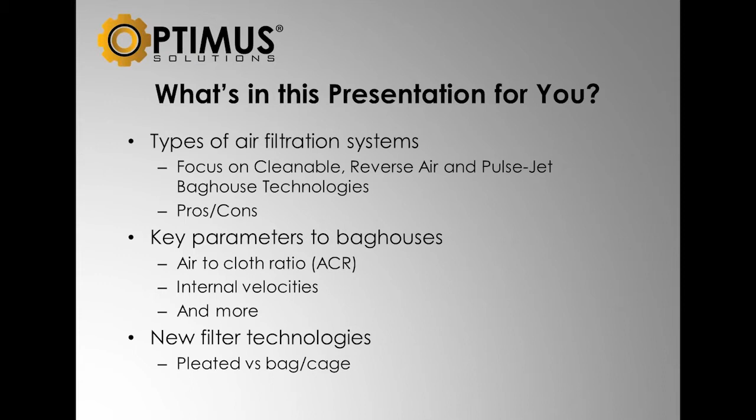My background is, as Tom said, I've been in the industry a long time, in various positions as chief engineer, technical director, that type of thing, mainly in hot gas filtration. But also in pneumatic conveying, process-type filtration, smaller collectors, and even larger gas turbine inlet filters. So I've got fairly wide experience in cleanable dust collection. This whole presentation is basically focused on cleanable gas, where you're using some method to intermittently clean, or have a continuously operating collector, rather than a static furnace-type filter.

One of the natural questions is why do you have particulate control, dust control, fabric filtration, however you want to term it. Mainly there are three areas: collect product, which is more of a process-related application where you're generating a usable, sellable, valuable product. Second, probably most common for larger utility-type baghouses, is nuisance collection, where you're complying with government regulations - that could be OSHA, could be MSHA - basically where you're required to control emissions to a certain level. And third, to protect resources, which is somewhat related to regulations, but it's to protect personnel, prevent toxic materials from being released, that type of thing.

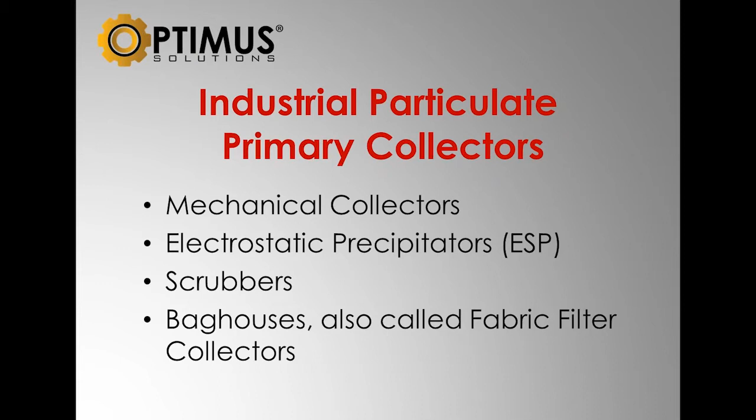Typical industries where these types of devices are applied - some of them pretty obvious - food and pharmaceutical processing. In food, you have both nuisance dust to prevent dust from getting from the atmosphere, but also your grinding, crushing, pulverizing, conveying material that you need to separate the dust or particulate from the airstream.

In chemical plants, you're doing the same thing: grinding, crushing, mass transfer, that type of thing. In consumer products, there's a lot of cosmetics, detergents, soaps, that type of thing involving some milling or some kind of size reduction of products. Mining, obviously, is the same thing, where you're taking rock or whatever, grinding it, and extracting it later chemically or whatever.

One of the big uses for a lot of the fabric filters is in rock dust - cement production, lime, asphalt, hot mix asphalt, coal, that type of thing. Agricultural products, that could be at the farm level where you're bringing produce into a grain elevator, and then it's taken on to food processing. Primary metal processing could be alumina, where you're grinding and processing or removing fluorides from the alumina, and batteries.

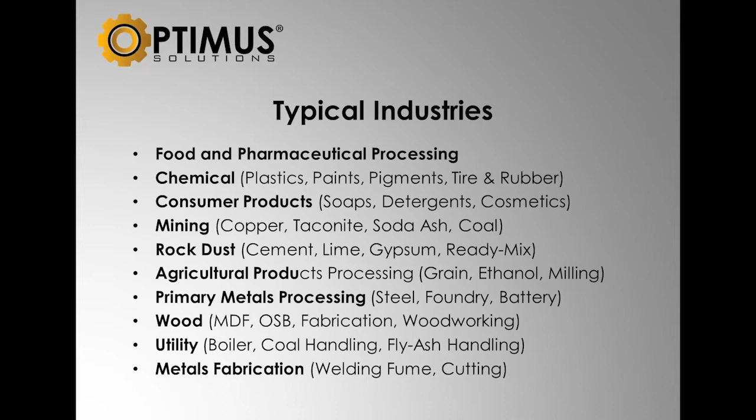So it's very much custom equipment. If we talk about pre-collectors, all of these except the last one are basically utilized mainly as pre-collectors. The main purpose we're trying to serve with a pre-collector is to relieve the dust load, or to filter out, or to classify some of the usable products.

In other words, you might have a process where you have a usable product that is a maximum size or a minimum size, let's say 100 mesh, so you may want to use a settling chamber or a baffle plate type collector that's integral to your equipment to remove that product and not convey it to the baghouse, where you then have to separate it from the finer product that might not be usable.

So in a lot of industries, probably the knockout box and cyclone are probably the two most common collectors used as primary or secondary collectors, or as pre-collectors. The cyclone, especially in the 50s and 60s, was used a lot as a final filter.

And you have the problem there that on smaller particle sizes, you might only be 80, 90, 95% efficient, which after all the legislation is not going to meet current requirements, but it's still very useful in separating larger products or classifying it. So would this be normally a requirement, or is it a little less expensive just to have this kind of coarse filtration first?

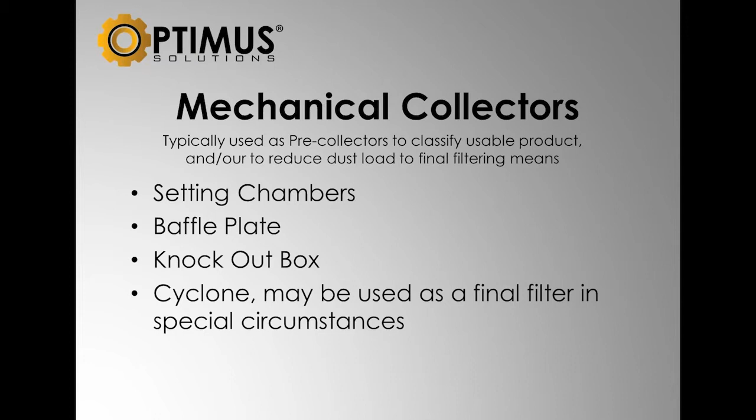Cyclone -- to talk about some of the advantages and disadvantages of cyclone collectors: there's no moving parts, it's simple, it can be fabricated by almost anybody that has simple fabrication methods. It's able to handle very high temperatures, only limited by whatever metal is used in the construction, and you can combine a large number of smaller cyclones to really increase the overall efficiency of the collector.

One big disadvantage is the airflow through the collector varies, and it drastically affects efficiency. If you have a process like combustion where you're constantly varying the airflow to meet your combustion demands or cycle demands, your product is going to go all over the place in terms of amount and size. It's not suitable for sticky materials, and if you're dealing with a very abrasive product, you can have a lot of wear issues.

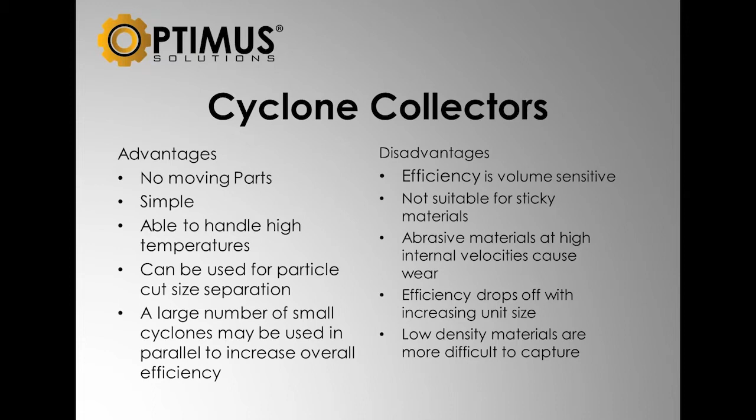Your efficiency drops off very dramatically with smaller particle sizes, so if you have a lot of small particles you're trying to collect, it may not be the best choice. Low density products like wood shavings are difficult to capture and recirculate back through the system. And if you look at typical cyclones, a standalone or large diameter cyclone is probably limited to about 10 or 15 feet in diameter, or then you start having a lot of bypass.

To make them more efficient, you can combine them into a multi-tube cyclone where you have many smaller cyclones stacked together, and you can achieve efficiencies of 95% or more below, let's say, 1 micron or below 5 micron. So it's still a workhorse of industry, but still not usually considered a primary or final collector.

Yeah, you can get most of it. It's more of a polishing situation.

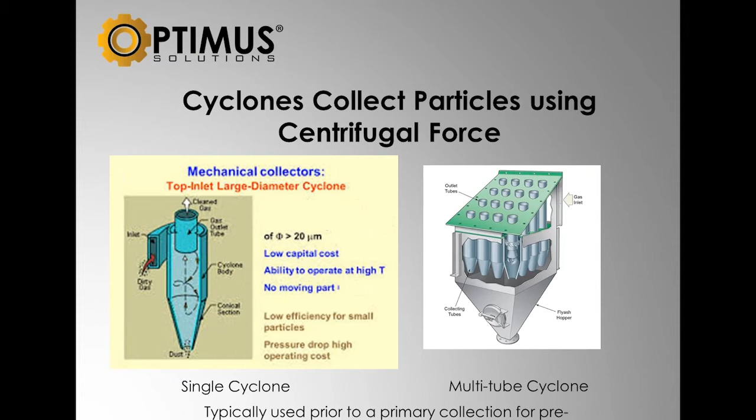The other technology that was used particularly in the mid last century were wet scrubbers. When I'm talking about collecting product, I'm talking about particulate, not necessarily mass transfer, adsorption, or absorption, where you're trying to do more than just collect a solid particulate. So I'm limiting the discussion today to that type of application.

Wet scrubbers have a lot going for them. You're able to handle sticky, hygroscopic materials, and combustible, corrosive, explosive materials. These are particularly valuable as a type of collector to use for coal or where you're handling metal dust or something that is extremely explosive. They're very good, and they're used a lot for that.

They're also good for collecting particles that are difficult to remove when they're dry. And you can have soluble gases and things like that you can collect. They'll be collected in these filters that wouldn't be collected in a dry filter like a baghouse.

With these liquids in the scrubber, is that normally water, or can it be a solvent in the case where you're trying to remove some kind of soluble product that you're trying to recover or prevent from getting to the outside? You can also add reagents to absorb sulfur oxides, or there's things like that can be done with a scrubber that make it a very versatile tool.

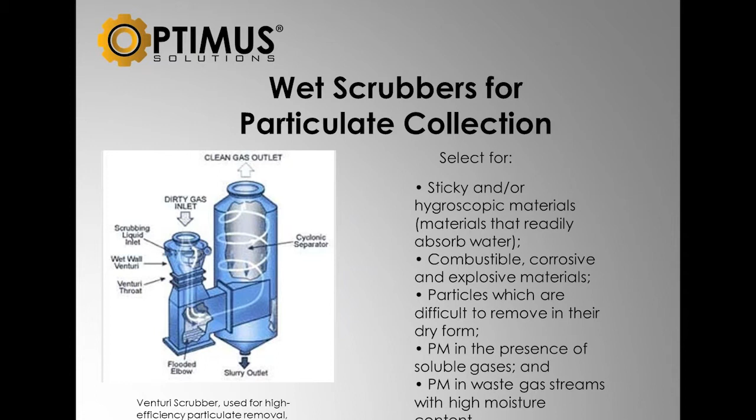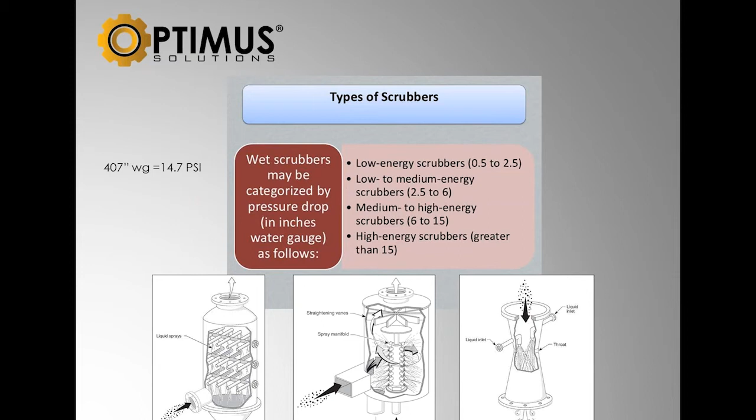Advantages: low capital cost. They can treat high temperature gas streams, and they can collect really sticky products, and there's no secondary dust sources. Disadvantages: you might have to have a pond or a tank or recirculate.

You're using a lot of water that may be hard to get rid of once you've got the pollutant involved with it. And you're wetting all the surfaces inside.

So if you have acidic gases, you can have a lot of corrosion and issues with that. And then usually you have to have a cyclone or something to take out the heavy material, to reduce the dust load on the collector. Water pollution is an issue, and it requires freeze protection. Obviously, you can't operate them at low temperatures without having freezing issues.

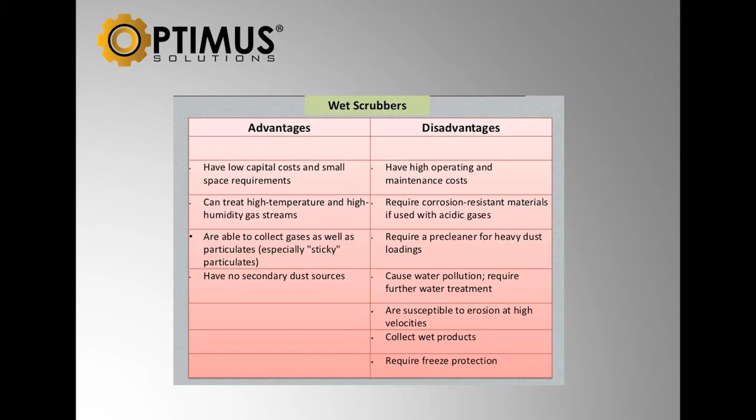So it almost sounds like you want to use wet scrubbers if you need to, not because you want to. Right. A typical use, a lot of them are used for really sticky dust streams, like if you're producing cereal where you're using sugar as your coating materials. Obviously, they're very good for controlling that. You couldn't put that in a dry collector. But again, they're limited, especially the lower pressure drop collectors are not very efficient. But they have their place, and they're still used worldwide for particulate control. One of the probably most common types of collectors, especially used in utilities, or

probably in the 1960s through 1990s, were ESPs, electrostatic precipitators. Basically you're putting a charge on a particle of one polarity, and then you have collection plates of the opposite polarity, and you're collecting the products on either plates or wires, and then periodically you're rapping them or doing some mechanical action to dislodge the particles.

The real advantage on these things, and the reason why they were used a lot at cement plants and large volume applications like utilities, is they're very low pressure drop. Because the velocities through the collector have to be so low for the particles to be collected by electrostatic forces, you're at laminar flow, maybe 200 or 300 feet a minute through the whole collector, so you can handle large volumes of air at very low pressure drops across the collector.

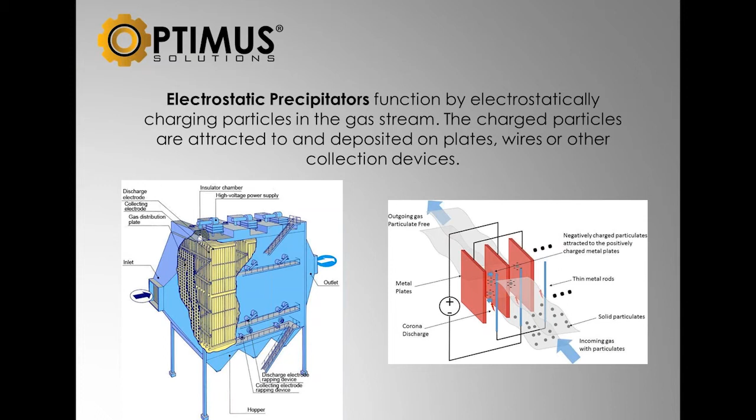So they're very economical. The problem comes if the resistivity of the ash that you're collecting changes. In other words, one of the problems with power plants when they switched over to some of the lower sulfur coals, the resistivity of the fly ash changed, so the efficiencies dropped dramatically.

And also, once they're installed, it's very hard to make them increase the flow, the capacity, or make changes to them. They can't control gaseous emissions. They're simply for particulate, and the initial capital costs are very high.

And these things are huge. If you look at a typical utility boiler application, these are football field size collectors. One nice thing about them, since there's no pressure drop to speak of, they don't have to be structurally really robust, almost like a building is basically what you have, but that prevents them from being, in some cases, converted over to other higher efficiency type collection equipment.

They're really low operating cost, they're durable, they last for years, and they can have very high collection efficiencies even for small particles. But for the most part, the newer legislation that has dictated lower emission levels, they can't meet those levels of efficiency.

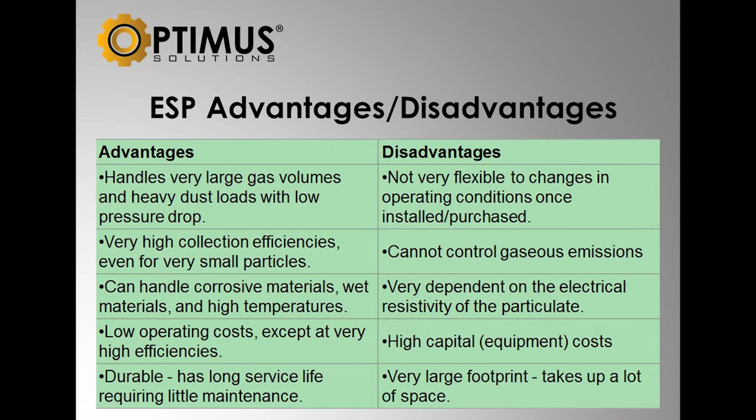So the next technology, probably one of the oldest technologies for fabric filtration, is the shaker baghouse. And I think there were some of these around even in the early 1900s, probably on metal collection and fume collection.

Up until the 1960s, it was probably the most common type of collector that you might encounter in the industry. And typically, the big difference on this type of collector is that the gas comes in through the interior of the filter, not on the outside, as we'll talk about later on some of the other filters. So all the incoming dust and airflow go up through the internal tubes. And these are intermittent type collectors because you can't have filtration taking place during the cleaning cycle.

Typically these would be in compartments. There might be a baghouse divided into several compartments or separate modules, and that module would have to be isolated and taken offline. Then a mechanical shaking mechanism would cause the dust to dislodge and fall into the hopper.

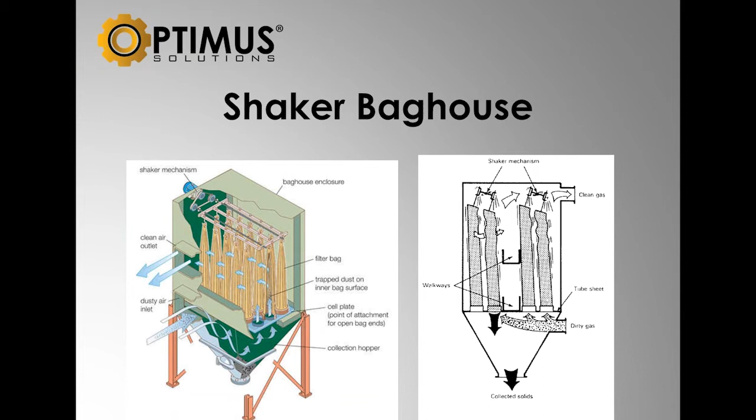These were very effective, simple, and the collection efficiencies could be very high. They did operate at very low velocities - we'll talk about this air-to-cloth ratio factor, but it basically means the dust through the fabric has to be in a neighborhood of less than 2 to 1. You can have low DPs and collect fine product, but they are limited. They are big because it takes a lot of filter area.

The maintenance can be very expensive because you're shaking, you have mechanical parts. It requires people to enter the compartment to do maintenance work, and they're not really good for heavy dust loads, because abrasive dust everything has to come through the bottom of the filter, so you can have wear issues if velocities get too high. There's still a lot of these around, but they're probably not the first choice for a high volume, varying flow type system.

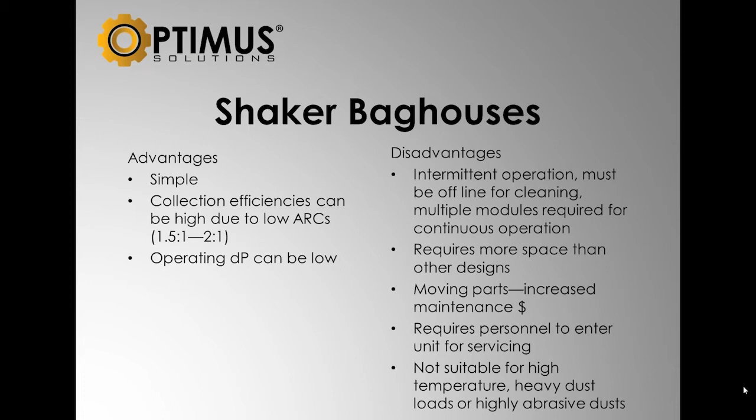The next step up in technology from shakers, chronologically, were the reverse air low ratio baghouses. The same way as a shaker, dust collection takes place inside the tube or filter. Instead of shaking, typically a module is isolated, and then either a pressure fan blows air in the opposite direction of filtration, or in some cases negative pressure in the system draws air in, and they might even be combined with shaking.

There are some units that have both shaking and reverse air. The big problem here is that they're usually talking about fairly long tubes, maybe even 30, 40 foot long. So you have to have metal rings sewn in at various intervals, which keeps the filters from collapsing and trapping dust during the cleaning cycles.

These were used a lot in power plants as an alternate to the ESPs up until the last few years. Now, typically, most of these have been replaced by pulse jet type collectors.

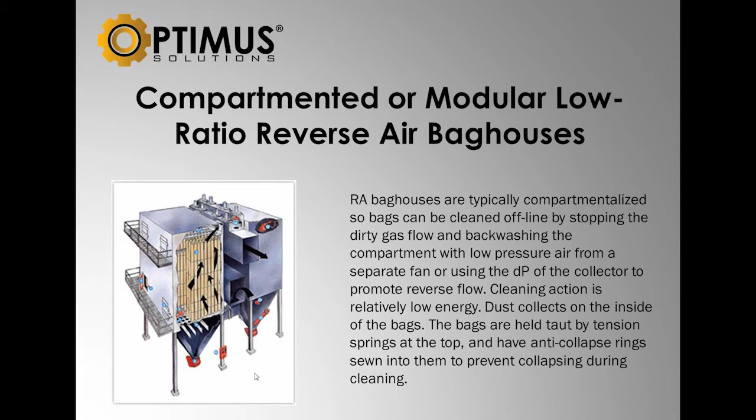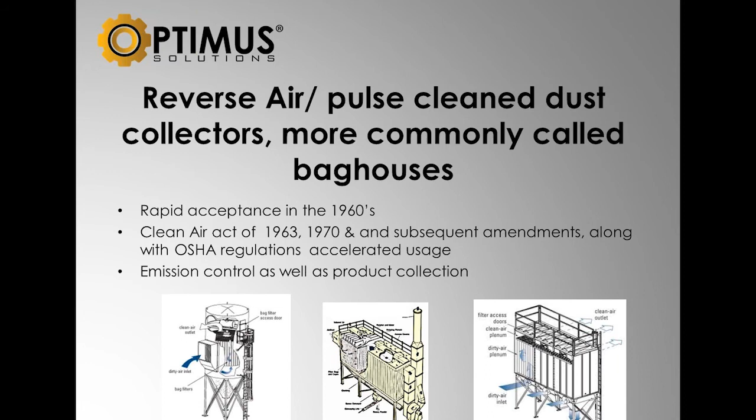The equipment I want to talk about mainly, on the right here, is a pulse jet collector. Here we're using compressed air to backflush and clean. This type of filter is really probably the most commonly encountered piece of control equipment in the world now. It has a lot of advantages.

It can arbitrarily be classified in 3 ways. Our equipment is configured and sold in 3 different categories, and it all has to do with the pressure of the air used for backflushing. These are kind of arbitrary because they change a little bit, but the low pressure, high volume are typically cleaned using a PD pump or a Roots type blower, whereas the medium pressure and high pressure, low volume are typically using compressed air. In some cases it can be a gas, could be CO2 or nitrogen, if you're dealing with a combustible atmosphere.

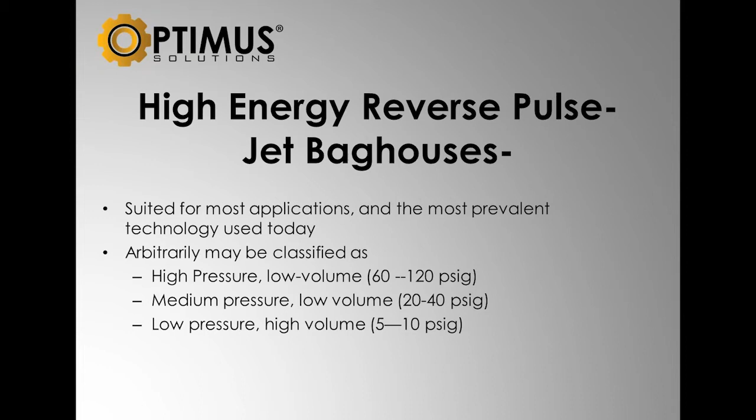So if I had to break it into 3 chronological progressions - would it be we start with shaker, then reverse air, and now pulse jet? That's kind of the progression. I mean, there's obviously overlap in the use. Right, that's true.

And the pulse jet now is the main one. I mean, there may be instances where some of the other technologies, because of very specific system requirements, may still be the preferred method, but this is the most commonly encountered method these days.

Those things require modules, mainly because a utility typically has to operate year-round, 24/7. So in order to do maintenance or take something offline, they need to be compartmented. Plus the cleaning is sometimes done offline. You take a few modules offline and reverse clean to assist in dust removal. So they're typically modular or compartmented style collectors.

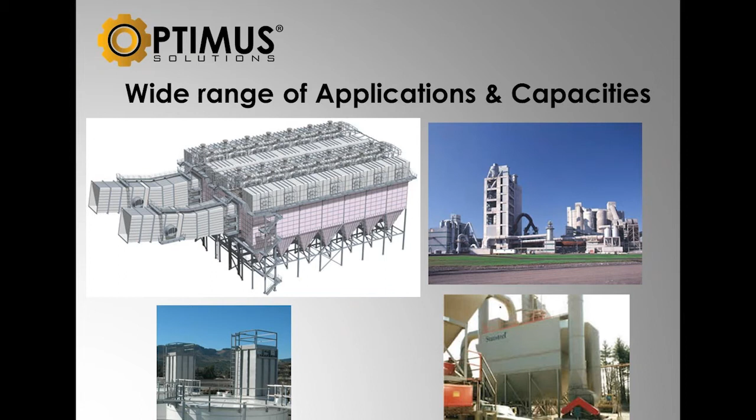The pulse jet, the different... when we're talking about a reverse air unit, excuse me, the reverse air unit with the fans or other methods of cleaning may have a few seconds, several seconds, or maybe minutes where the backflushing takes place, and this decreases the effective filter area that's online.

The pulse jet cleaning takes place with a short burst of compressed air. Now, the electrical on-time or signal is usually 1/10 of a second, but the effective cleaning valve opening and closing is probably 1/4 of a second. So you can have filtering taking place online without effectively affecting the flow.

The cleaning is actually done while the unit is online, the reverse pulse overcomes the flow through the filter bag and has enough energy to actually create a shock wave that removes the dust. Very effective, very cost-effective cleaning mechanism.

The cleaning cycle is regulated by a remote timer connected to a solenoid valve. This can be done from very simple control systems all the way to PLC and computer control systems.

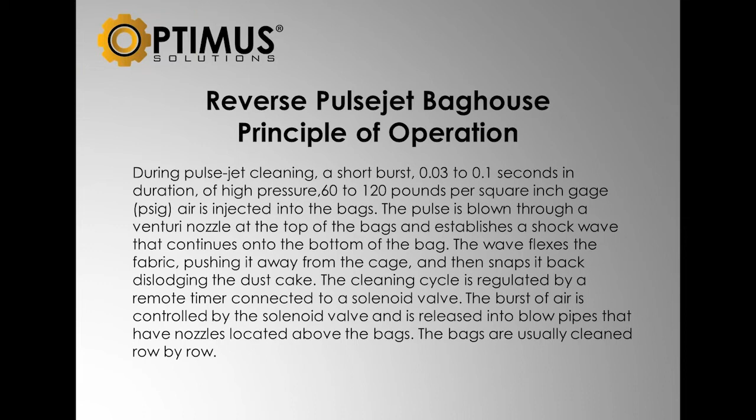You don't want rows next to each other cleaned together. You don't want the dust just jumping from a clean bag over to a dirty bag, or a dirty bag over to a clean one. So you want to stagger it. A lot of collectors are set up to clean sequentially, but I always like to have some separation during the cleaning.

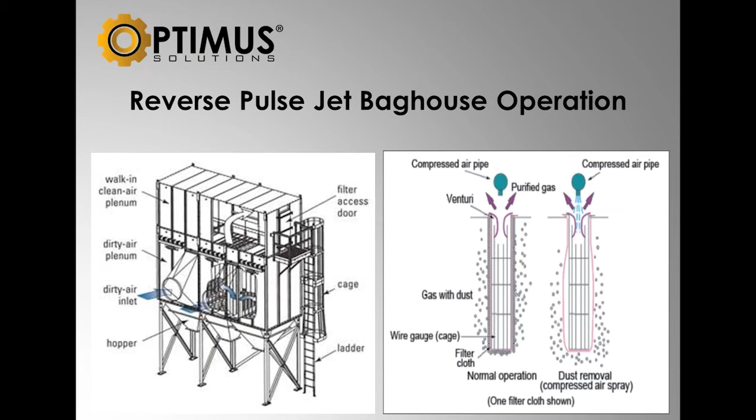We're going to talk about some of the things that are important to the design of a baghouse. It's important for the end user to convey what they're really trying to do with a piece of equipment and what's critical to them, to the designer of the baghouse. The designer is going to use that information, and we're going to show some typical data sheets for accumulating that data.

They're going to use that information to select the material, the air-to-cloth ratio or how much material is going to be used for the gas flow involved, the upward velocities between the filters and in the housing, the inlet where the dust is going to come in, what kind of cleaning mechanism is going to be used, and ultimately how you're going to remove the dust, whether it's a screw conveyor, simple hopper, that type of thing.

To quickly summarize, what we just did was chat about the different types of air filtration systems. You can have a pre-collector related to cyclones, et cetera. You can have scrubber systems, ESPs, baghouses, and we'll chat a little bit about the progression on baghouses from shaker to now the pulse jet.

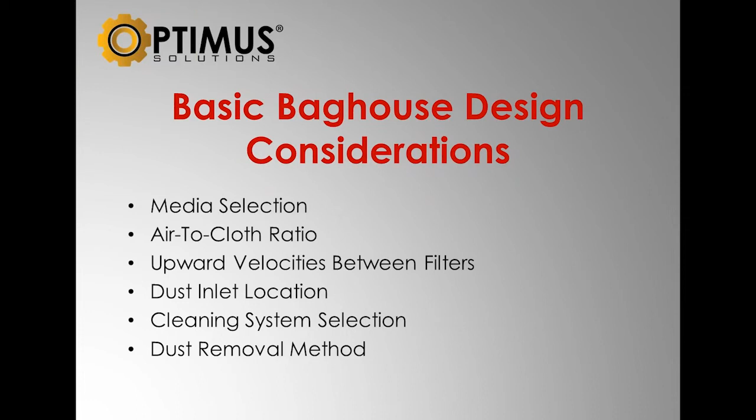One thing that really affects the efficiency and ultimate pressure drop of a collector is the size of the particles you're going to collect, and it's not only the range, but also where the distribution of particle sizes is concentrated. If you have a very coarse product combined with a very fine product and nothing in the middle, that requires some different considerations. So if I were the plant, or someone designing, these would be the things you'd start going through on your checklist.

If I want to go from scrubber to baghouse, or from baghouse to a bigger baghouse, here's the data I'll probably start needing. It's important to know the distribution, how and where it's concentrated, particularly on the small fraction - just how fine is it, and what percentage of the total dust load is that fine submicron, below micron size, or even maybe 5 micron.

The air - when I say air or gas, air is a mixture, a mechanical mixture of gases. In a lot of cases we're collecting combustion products, which aren't really technically air because of the constituents. So anyway, when I'm using that, I mean gas or air interchangeably.

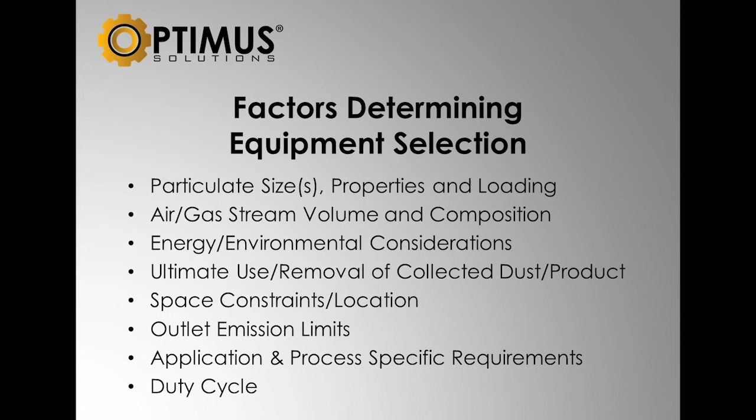Once you know some of this material, this information, then you can pick a fabric, filter media. Probably the workhorse of industrial filtration is polyester, which has a limit of 275 with the fabric and 250 with some of the other more rigid products. It's good for most things.

Acrylic is not used a whole lot, except for some problems where you are in the higher limits of moisture. Fiberglass is used a lot for boilers and for hot gas applications. Nomex or aramid fiber is used primarily in the rock industry, where you're talking about below 400-degree temperatures.

Ryton is used in power plants, usually on a reverse air baghouse, typically PPS or Ryton. P84 is kind of a specialty product that not a lot of people are going to be using, but it's used where some of these other products aren't useful. Ryton is not very good at high oxygen levels, so you might have to use a P84. It's not a very common fabric.

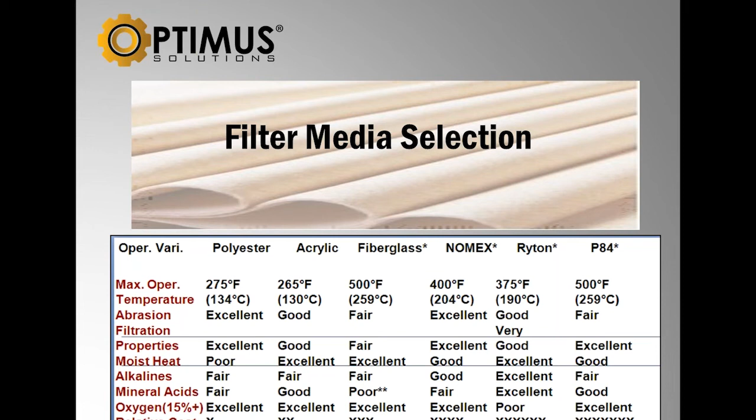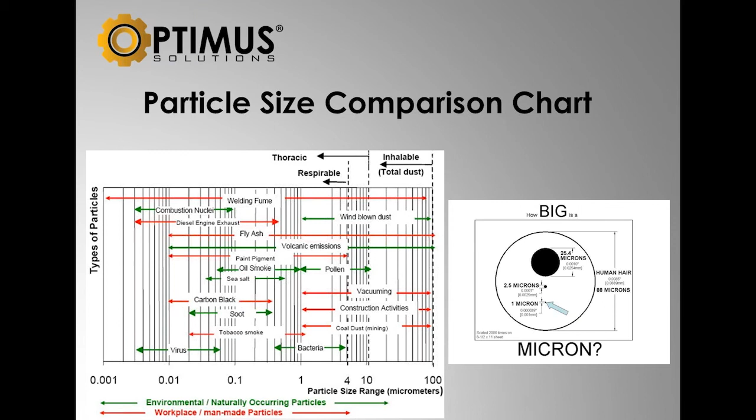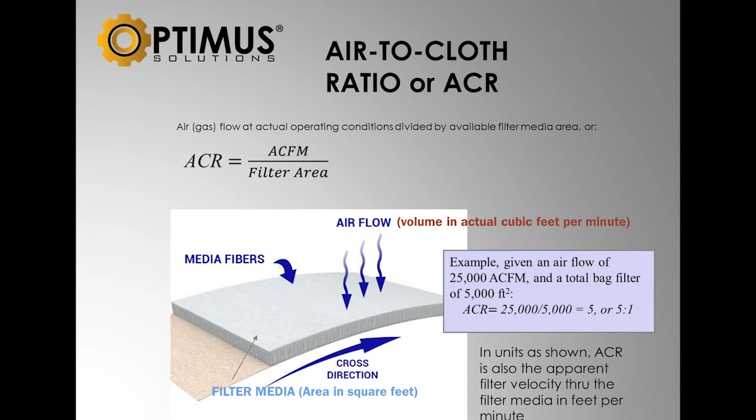If you look at typical air-to-cloth ratios for nuisance type collectors handling fairly light loads, 5 to 7 to 1 are pretty common. Boilers and high temperature applications are usually in the 4 to 5 to 1 ratio. Agricultural dust can be as high as 10 to 1, easy to collect type products. Fume generated by thermal processes is 1 to 3 to 1, even with pulse jets, they're very low.

So what does it mean if it's high versus if it's low? Well, the higher air-to-cloth ratio you can go, the smaller the unit can be, cost-wise, the footprint. But on the same token, if you start pushing the air-to-cloth ratio, then your operating pressure drop typically increases.

These typical baghouses work in a range of about 2 to 8 inches of water column. And if you've got a large amount of gas you're collecting, your compressed air costs can go very high. So in some cases, you're better off, even with a higher capital cost, selecting a collector that operates at a lower air-to-cloth ratio, from the energy conservation standpoint, compressed air usage standpoint.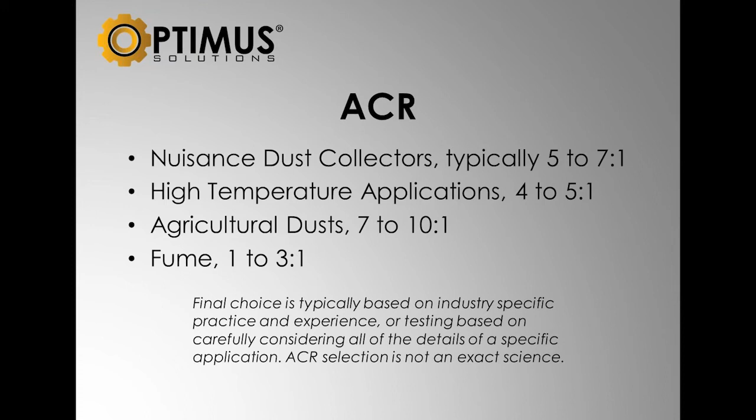Another factor that's important, especially on these larger collectors, is your bag lengths start getting over 10, 12 foot long. Some utility baghouses can have 30-foot filter bags in them. When you start getting larger, probably over 10 foot in particular in length, you have to be sure that the upward velocity between the filters isn't such that the dust being pulsed off never falls down. If your upward velocity is higher than the terminal velocity of the particles, you're going to have an issue.

When you calculate this, some people interchangeably call this can velocity, but I think that's confusing, because some people use that word to describe the velocity below the filter bags, where you don't have bags. But I think the important factor here is what is that velocity between the filter bags.

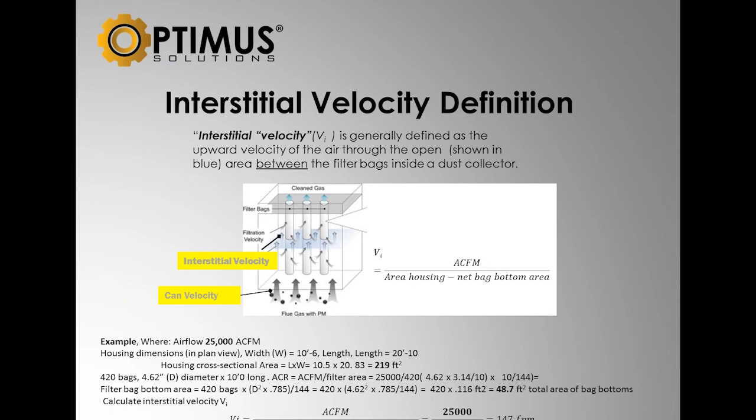Basically, you take the cross-sectional area of the filter housing and subtract the area that the bag bottoms take up, then divide that into the air volume, and that gives you your apparent velocity between the filter bags. Typically 300 to 350 feet per minute is probably safe for most products. But if you get into a low density, high filter area particle, it can be as low as 50 or 100 sometimes. So that's another reason why knowing all the properties of the dust and the application are important.

This is just a typical system. I just showed this to show the principal components in a pulse jet or baghouse, compressed air tank. I think it's important you have a reservoir for a couple reasons: to allow some condensation to take place and keep that away from the baghouse, and it's very important that you have clean, dry air being used to pulse filter with. It's important you have a filter trap or moisture trap and also an oil separator prior to going into the dust collector.

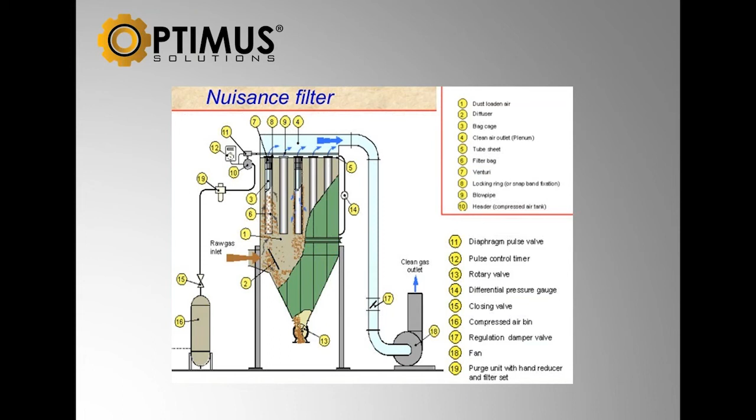Item 10 here just shows a typical reservoir, the header where the pulse valves are mounted. There's your controller means of some way, showing a sequence of valves, and then the clean air plenum and the dirty air plenum. Most of these filters are set up as a negative pressure arrangement so that any leakage you have is into the filter and not dust out into the atmosphere - puffing on the outside. So you want leakage to be clean air in, not dirty air out.

Advantages of pulse jet, reverse air pulse jet collectors: very compact. You can operate at usually much higher air-to-cloth ratios than you can with the other technologies we talked about. One good thing is they're stable, because you're pulsing online and pulsing only a small part of the collector, and by using a small volume of air to pulse with, they're good for combustion processes or air applications that require constant flow and not much variation in pressure drop. Very high collection efficiencies are possible. They can operate up to 500 degrees, and even higher with specialized medias. The dust inlet location can be varied depending on the type of particulate you're collecting.

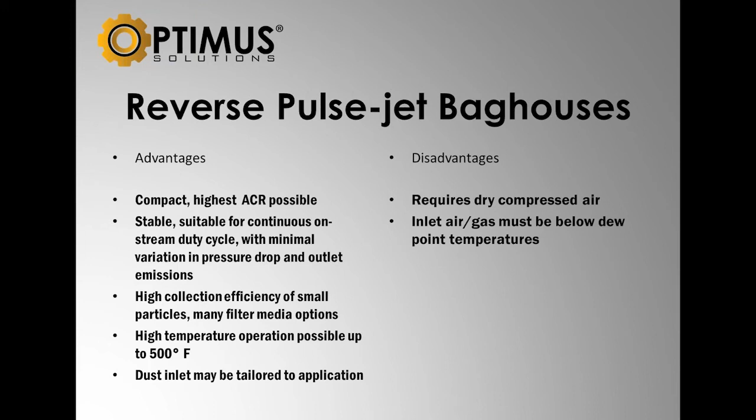Disadvantages: they need dry compressed air. If you're operating a baghouse in Michigan in the wintertime, you really have to worry about moisture content in your compressed air. Obviously your inlet air or gas has got to be below dew point, or you're going to have mudding or other operational problems.

It's very important that each one of these valves, when you operate - the typical sizes for a dust collector are anywhere from 3/4 inch to 1.5 inches, maybe as much as a 2.5 inch valve. A 1.5 inch valve will consume about 4 CFM in a pulse.

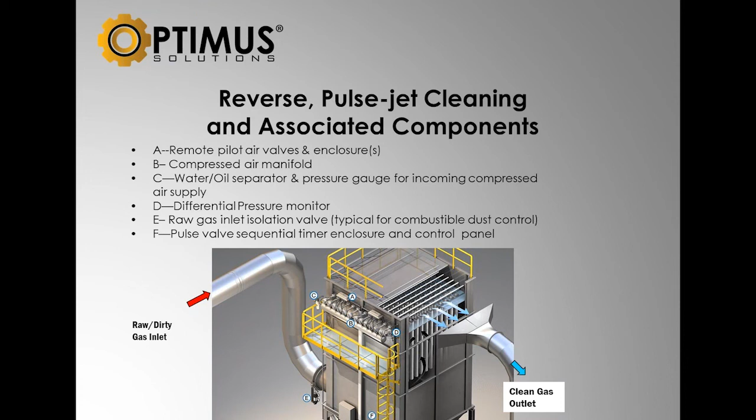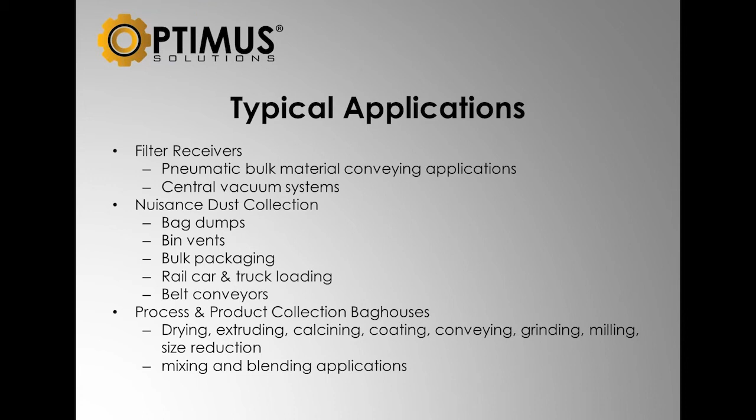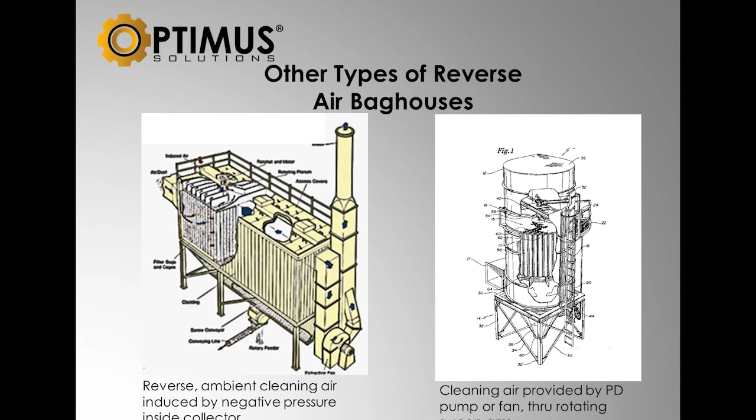Explosive - if it's explosive, then that causes issues, and most organic products are. People don't think about sugar and coal and corn, and get to plastics - all those things are explosive. If you can burn it, it's explosive for the most part. And even metals - you can have fine aluminum or magnesium or something, it's very much the same. So it's important to know if you have any of those products you're handling.

And there's very specific National Fire Protection Association and factory mutual requirements if you have any of those products, depending on where they're being used, what has to be done, and whether it's an inside or outside location.

And then the particle size distribution - a lot of people aren't going to know this, but today with some of the requirements that OSHA has, although some of those requirements are suspended right now or not being enforced, it's very important to know the particle size distribution. And if you've got an explosive product, as a user, you're responsible for telling whoever's designing the equipment what the particle size distribution is, because that affects how explosive the product is.

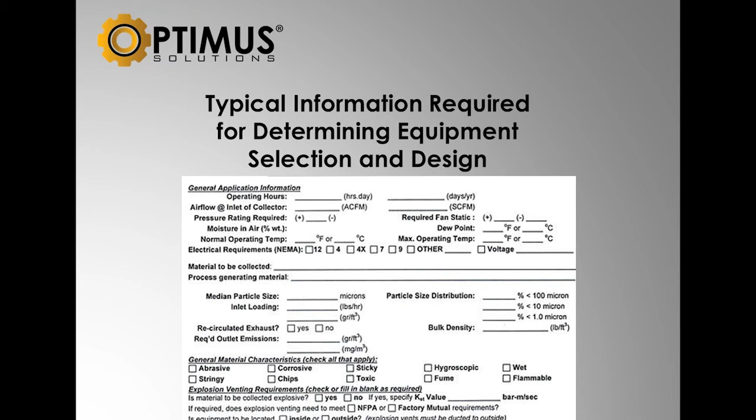Okay, so overall on the design side, the particle size is incredibly important - I know that you mentioned that multiple times. Right, and ultimately that determines what media you pick, depending on the sizes. And it sounds like also you've got your air to cloth ratio, right - you can have it high, you can have it low.

The two competing parameters: you can put more air in or less air in, but that will affect your pressure drop. It's that two competing pieces that ultimately you pick depending on the application. If you can handle more, great. If you can't, that's fine too. It's more of here's 10 different factors we need to consider, and here's kind of that sweet spot you need to be for that application.

That's true. Even if you can tolerate a higher pressure drop by pushing the unit, you also have to worry about a tipping point. There's a point where the cleaning system is not going to work, not going to effectively keep the pressure drop constant, and you're going to lose control. Typically if that happens, the unit has to be shut down, and hopefully you can recover by cleaning offline or reducing airflow. That's why some people think, well, if I have 1-inch valves, I can put 1.5 or 2-inch and get more air through it. But for a given product, process, and concentration, there's a tipping point where all the pressure in the world isn't going to help.

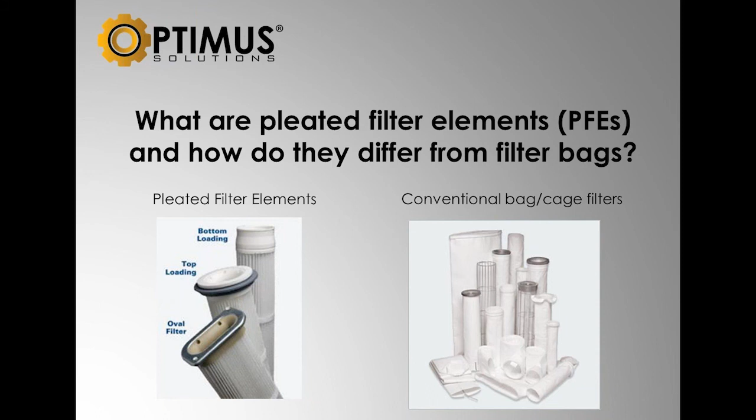If you look at a typical bag, the one on the right, for some reason the size is missing, but I recall this is 16 feet long. At a 6-to-1 air to cloth ratio, this bag would have a capability of about 200 CFM. The same filter, a 6 foot 8 inch pleated filter, operating at a lower air to cloth ratio, would have the same capacity. So you're replacing, in this case, a 16-foot bag with a 6'8" pleated filter for equal capacity.

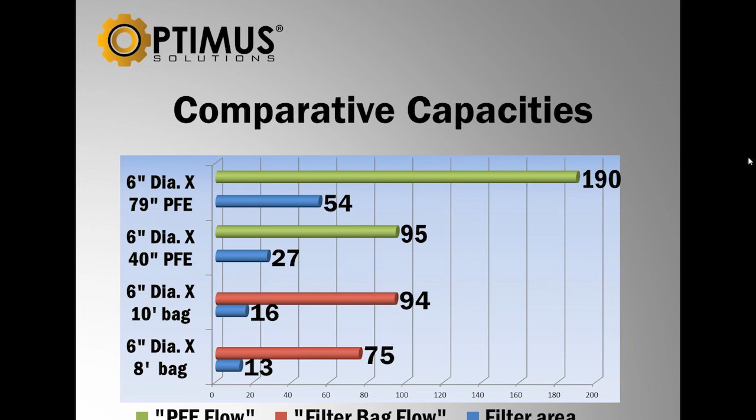Now there's some caveats on that. There's always a caveat—for some reason that's not changing. There we go.

There's some, obviously with the pleats, they're going to be a little more susceptible to clogging or filling up with a really wet product, and that type of thing. So there's some products that they don't work well with, but actually it's a very limited number of products that they don't work with.

Because we're talking about pleats now that are a half-inch wide at the top. They're not like a paper cartridge where they're wedged in 12 pleats to the inch. There's maybe 2 pleats to the inch. So we're talking about a wide open structure, and the depth is anywhere from a half-inch to probably an inch is typical. So we're talking about a wide open area there.

The other thing that helps pleated filters operate in fairly wet situations is that there are new finishes - oleophobic, hydrophobic treatments that are plasma deposited so that every fiber in the filter pack actually has an angstrom thick layer of our material to prevent water penetration or oil penetration.

An angstrom is 0.1 nanometers. And we're talking about actually a bond, a covalent bond, not just a surface coating. So we're talking on the scale of atoms. It's very effective, and it's even available for food grade applications.

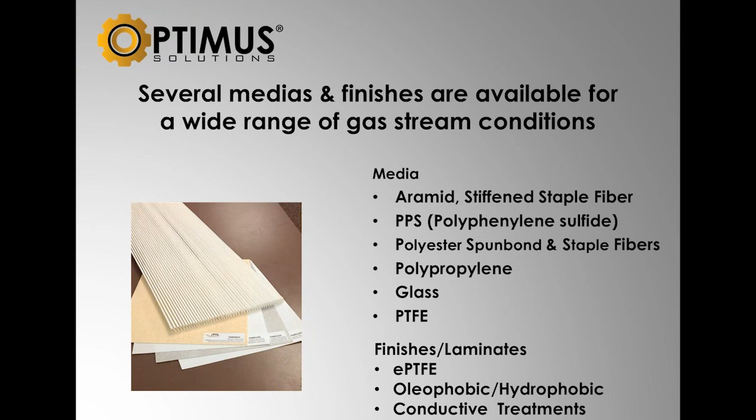Everything from, similar to the chart we looked at earlier with bags - aramid, PPS, polyester, again is a workhorse. Polypropylene in a limited amount for really wet situations. Glass and very, very specialized applications. And then the PTFE film, like you're familiar with in sporting goods and stuff, that have the layer of Teflon type product on it. Those are all available in all those products. So very versatile.

A very cost-effective way to take an existing collector and increase the throughput by 25 to 30, 40%. So these applications will be, you already have a baghouse with the conventional bags, and you've met the capacity or throughput or something - you've hit the limit on the baghouse. And this is a way to either extend that life or make a change where you can use that same setup or retrofit.

Absolutely, and you can also correct issues like if you have a longer filter bag where the inlet duct might not be properly designed, and you have a huge abrasion problem because you're having the airstream directly impact your filter bags. You can replace a 12, 14 foot long filter bag with a 6 foot filter bag, take the filter packs completely out of the abrasion zone. So there's a lot of things that can be done.

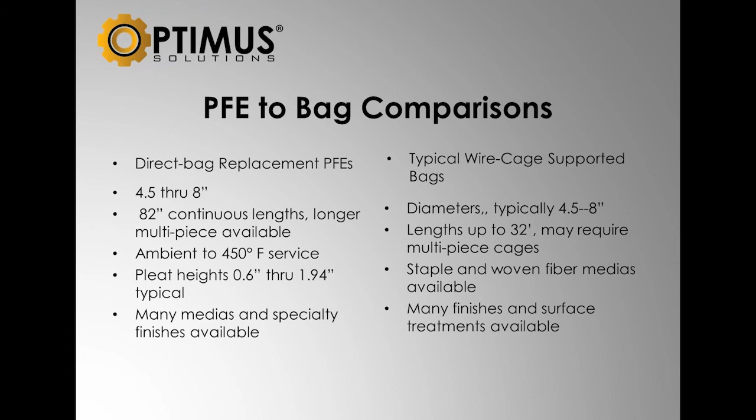Different length - if you have some issues with can velocities, you can put longer, shorter combinations in to open up that area for airflow. Typical applications, again, a lot like for the filter, almost identical filter bags - smaller pneumatic conveying equipment, the nuisance dust collection.

Still very wide - drying, extruding, all the same type of things are used where, and another thing I want to mention, people say, well, obviously you can't handle the same dust loads with pleated filters as you can with bags. Actually, the most of the areas these were used in originally were in pneumatic conveying systems. And instead of talking about 1 to 10 grains per cubic foot dust loading, we're talking about 100 grains, 200, 300 grains dust loading. So these are not like a paper filter - you would think those are normally very low dust loading type filters. These are built for heavy duty dust loading.

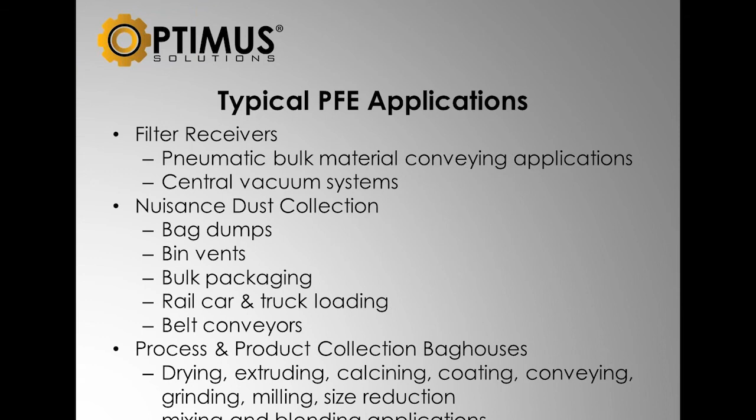Some of the things we talked about: if you didn't want to increase throughput but wanted to reduce emissions or save energy, you could go in. If you didn't want to increase airflow but wanted to pulse less often and operate at a lower pressure drop, this would be an ideal solution. It also corrects issues with abrasion and excessive cleaning. But the big thing most people are interested in is increased throughput.

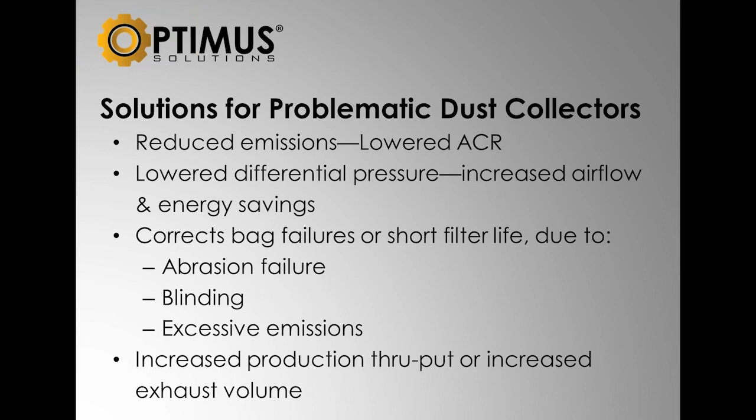So there are kind of three major things I'm getting out of this: if you want to make more stuff, this is an avenue. If you want to be more efficient, or you're told to meet emission standards, obviously these filters cost more than a filter bag and replace more than a single bag. But if your throughput is valuable, or increased flow to the dust collector affects your bottom line, these are very cost-effective ways of accomplishing those goals.

These are just a summary of the benefits already discussed. One thing I didn't mention is that these reduce static electricity discharge risk. If you have a metal cage in a synthetic bag, that metal is isolated from the collector, and people often use grounding wires to address that, but it requires someone to consciously attach a wire and maintain it. These filters are available for operation below 200 degrees with all synthetic construction, no metal parts at all. They're inherently safe because the amount of charged electricity that can build up on the surface is well below the minimum ignition energy of most dust, especially above 10 millijoules or 10 MIE.

They're inherently safe products, so a lot of people handling explosive or combustible products use these and don't have to worry about their maintenance people connecting grounding wires.

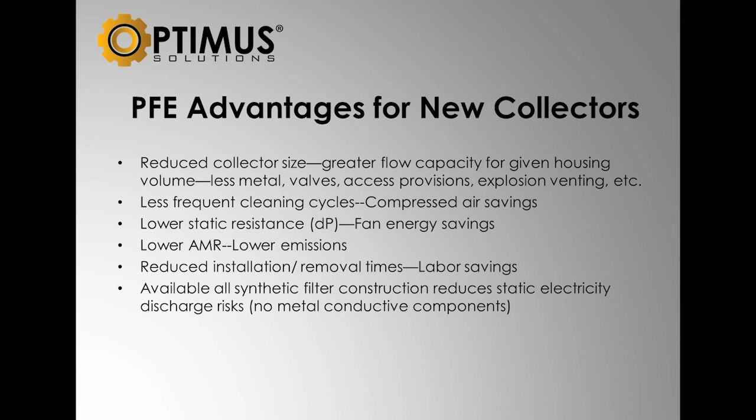Again, smaller footprint, but if you have a new collector, all the advantages of higher flow to a given size, energy savings, less compressed air. They typically operate at lower air-to-cloth ratios so pressure drops are typically lower. The filter can address abrasion issues, and it's a lot easier to change out a 6-foot filter weighing 8 pounds than a 20-foot bag weighing 35 pounds with dust on it.

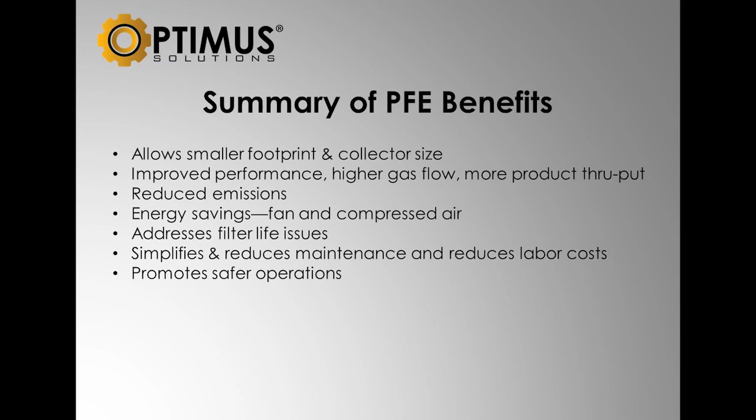So overall, the three big thoughts here are the different types of collectors - cyclone, ESP, scrubbers, and baghouses - the progression of baghouses from shakers to reverse air to pulse jet with some overlap, and some design considerations like cloth ratios and differential pressures, which all come down to efficiencies for a particular application.

And then we chatted about the pleated versus standard bag. There are a lot of advantages, and one consequence is cost. It sounds like if you've met the limit and you're at a spot where you need to improve just a little bit more, this is the avenue to go through. Well, it can also be a dramatic improvement in throughput. If that translates into saving more of a valuable product or making more product, then it's more than just a small incremental advantage.

So overall, we've finished the PowerPoints.